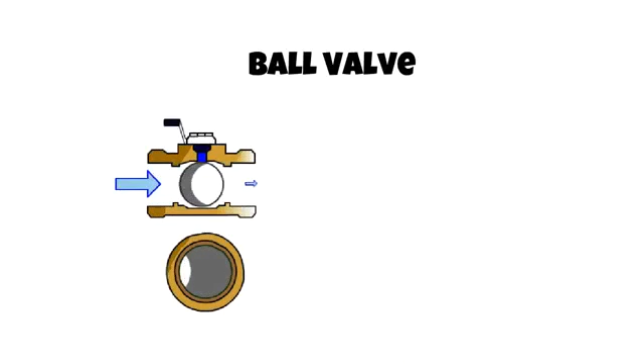In today's video, I'll be showing you how the most common types of valves work. Let's start with the most common valve, the ball valve. As the name states, there is a metal ball with a hollow bore that is approximately the size of the inner diameter or ID of the pipe. This is an important feature because when the valve is open, it doesn't obstruct the flow. This feature also allows the valve and the following pipe to be inspected or drain snaked.

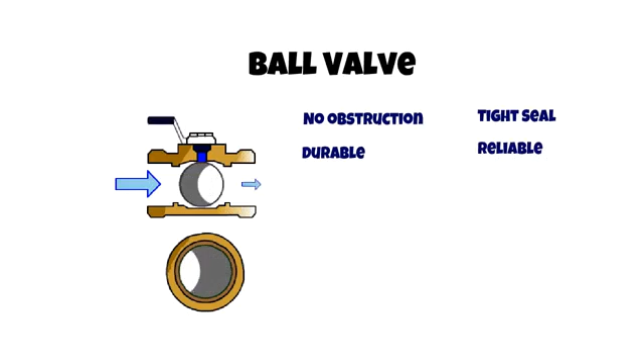The ball design also allows for maximum contact area, which results in a much tighter seal. They are durable, performing well after many cycles without leaks. Because the ball valve seals are not directly exposed to inline elements and debris, they are also very reliable. They can survive in dirty and harsh environments and can operate even after long periods without regular cycling. I have personally seen ball valves operate even after 40 years in an industrial setup.

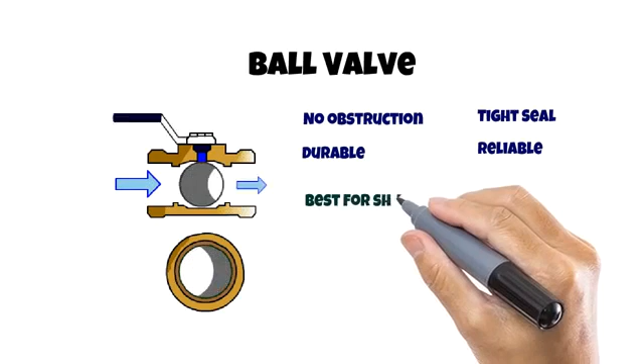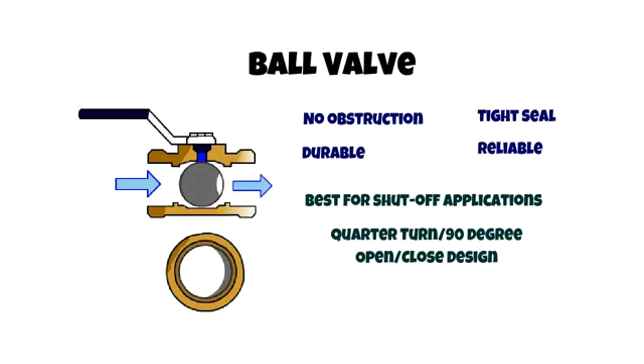They're best suited for shut-off applications thanks to their quarter turn or 90-degree open/closed design. The quarter turn action also makes ball valves very difficult to fine-tune and control output, so they are not recommended for fine flow control.

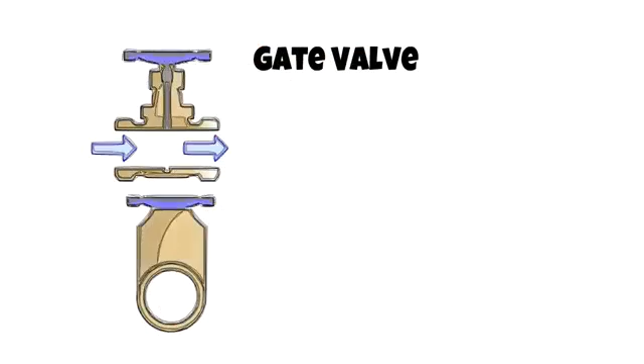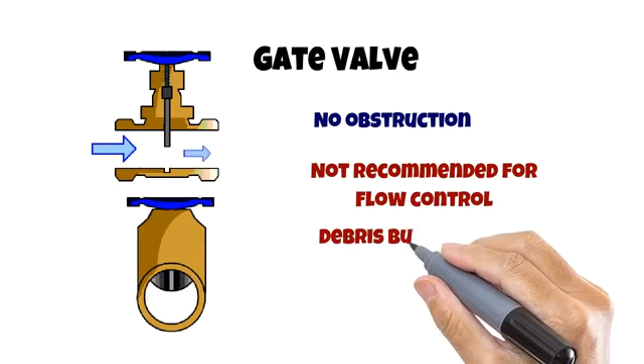Another shut-off valve is a gate valve. It works by raising and lowering a gate. Similar to the ball valve, they operate without obstruction and leave the pipeline open for inspection. Lowering and raising the gate puts a lot of wear and tear on the spiral stem, and they are not recommended for flow control. When the gate valve is open and operational, debris can settle in the seal, or seal erosion from the flow occurs naturally.

Furthermore, the sealing surface around the edges of the gate provides a very thin contact area, making gate valves very prone to leaks. Gate valves, however, are used for temporary work on the pipelines due to their light weight and their compact design when compared to ball valves. Their seals are regularly maintained to prevent leaking.

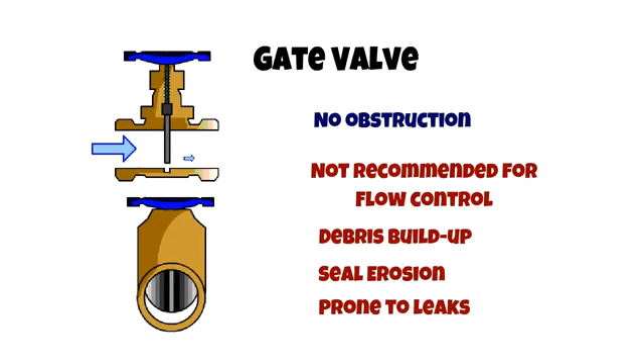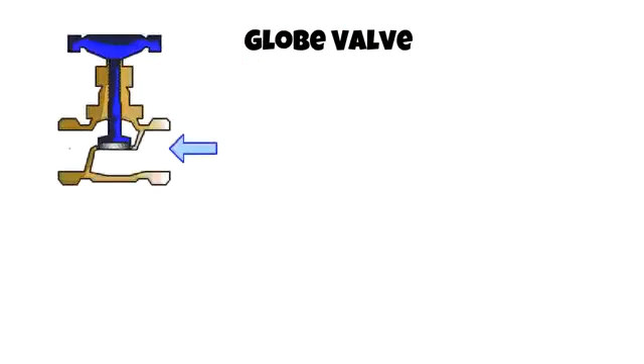Next, we have the most common household valve, which is the globe valve. The diverting arms provide the greatest resistance to flow, allowing for very easy and precise control. Globe valves are designed to be directional. If the flow is reversed, then the constant pressure damages the seal around the stem, which can cause leaks or total failure of the valve.

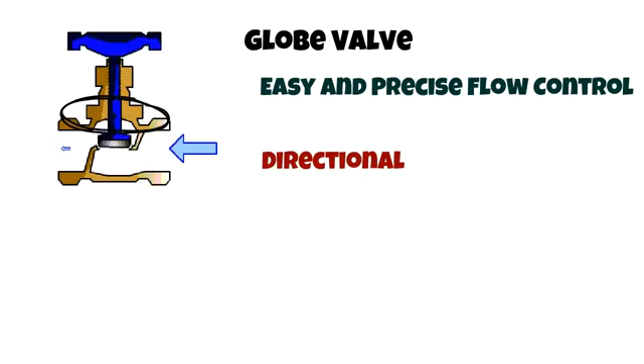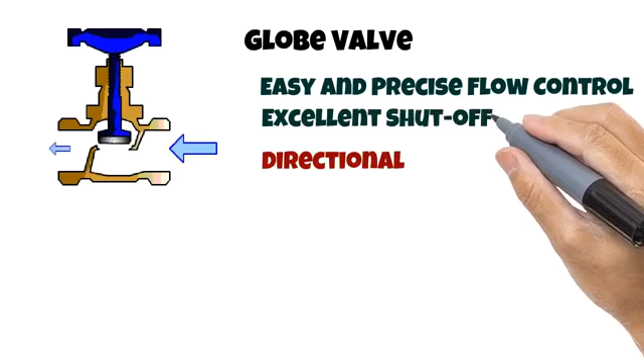They are also used as end termination shut-off valves when installed correctly, for example, at a tap or faucet, where flow control is required, as well as a perfect shut-off with an excellent seal. Globe valves should never be used as shut-off valves in between a piping system.

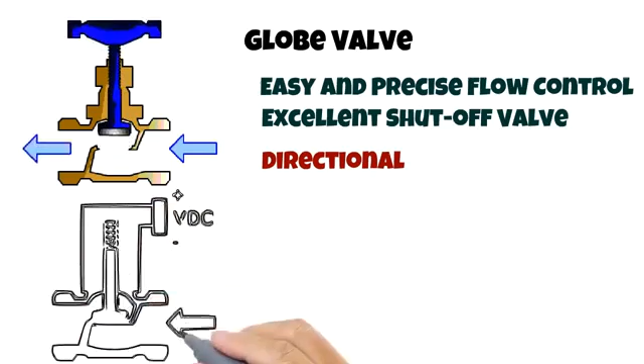Now there is a variation when it comes to globe valves, and that is solenoid or mag valves, which are magnetic or coil-based. An important note is that the diagram shows a normally closed valve. When current passes through the coil, a magnetic field is generated, which pulls the metal stem, compressing the spring. As long as the voltage is present, the valve will remain open. And as soon as the power is cut off, the spring pushes on the stem to seal the valve.

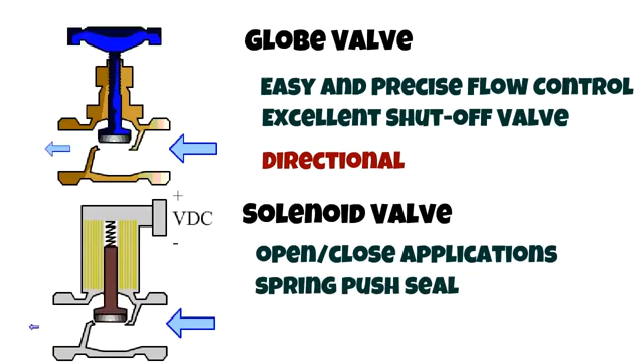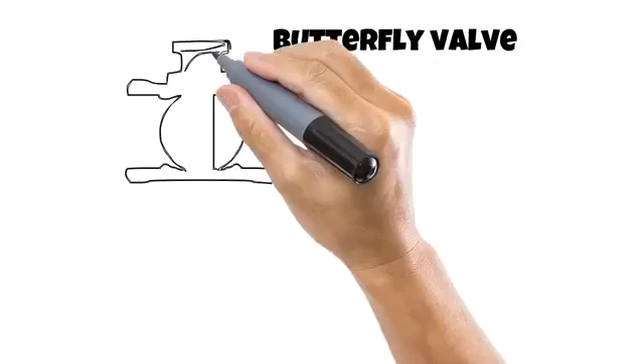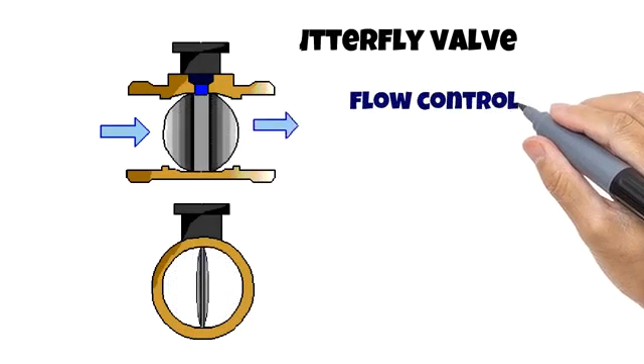Lastly, we have the other valves that are not as common, but still very essential to any system. Let's look at another quarter turn valve, the butterfly valve. In the little diagram, you can see that a metal disc pivots to restrict flow, hence the name butterfly. They are perfect for controlling the flow, and they are still regarded as quarter turn because of the disc action, even though some of them come with a small gearbox for even finer flow control. Butterfly valves are not used for shut-off applications as they are very prone to leaks.

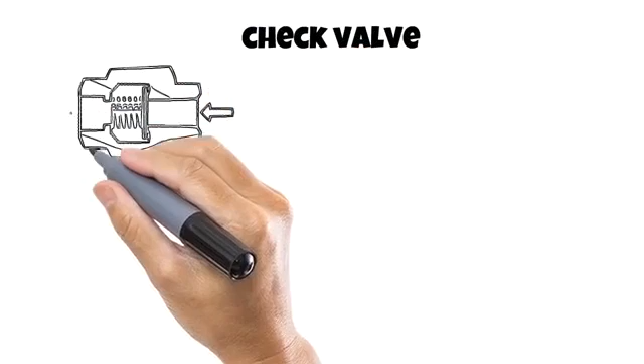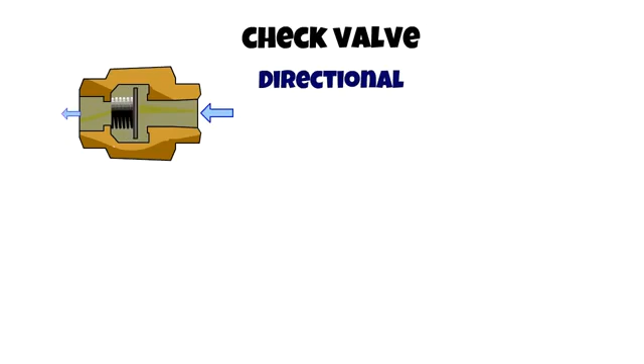Next, we have check valves. Check valves never get any attention because they are basically a set it and forget it type of valve. They only permit flow in one direction, meaning they are directional. In the diagram, the spring compresses and the disc is released from the seal when there is flow. When the flow changes direction, the disc is pressed against the seal. They are best suited for maintaining a separation, for example, keeping hot and cold water from mixing together under the sink, or as a safety net to prevent reverse flow in a fish tank.

These valves have saved lives by keeping operating pressure within a safe range. And the best part about the relief valve is that the failure occurs at the seal. And when that happens, the relief valve just prevents any pressure from building within the system. So a quick change and you're back up in operation.

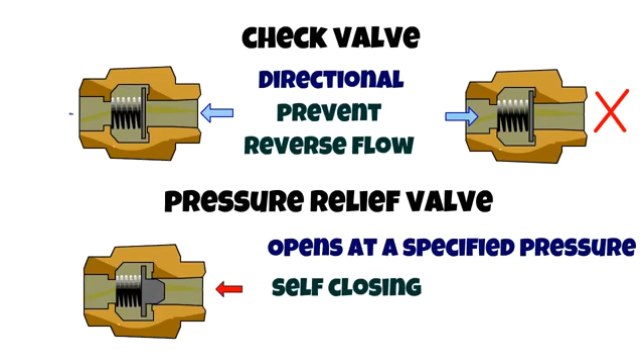In conclusion, we can see all the different types of valves working. They can be easily identified based on their action, or their seals, or their flow control. The important thing is to keep them operational as a safety net.